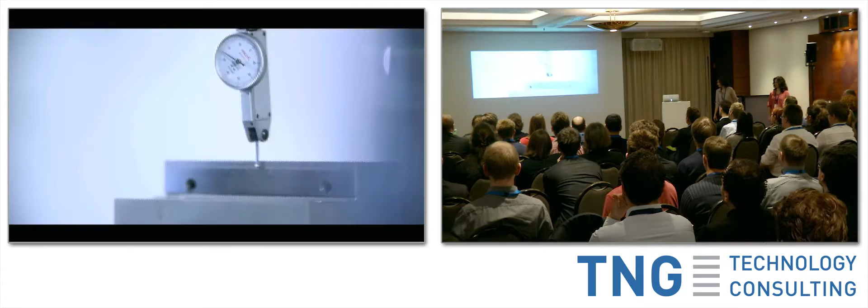The Hyperloop is a very perfect project to learn to design things. And this in itself is so important. So this will have an impact on engineering in the future. We want you to get on board and join our Hyperloop ride. We want you to share the same vision as us, the same vision as Elon Musk for a greener and more sustainable future of transportation. We want to tackle the issues of global warming, of traffic and pollution. And this has to start now, and we can only do this by innovating, disrupting the current mobility system. I not only think this is a very good idea, I'm convinced that they will win the competition. I'm crossing my fingers that they will succeed.

So yeah, Walter is probably right. We'll probably win the competition anyway.

But yeah, just a short introduction. So what is the Hyperloop? Whenever I tell somebody that in the future you will travel from Munich to Berlin in half an hour, the first reaction I always get is that everybody thinks I'm talking about science fiction and this will never happen. I'm here to tell you today that the Hyperloop is much more feasible than any of you ever probably imagine, especially because most of the technology behind it is actually things that already exist today.

And basically what the Hyperloop does is get one piece of technology from each application, copy and paste it, and combine them together in its own environment. So for you to have an idea how few different things there are in the Hyperloop: we are building a Hyperloop pod and have not come up with one patent or one research topic that we can register, because all of these things actually already exist by themselves. It's just the way of combining them that actually builds the Hyperloop.

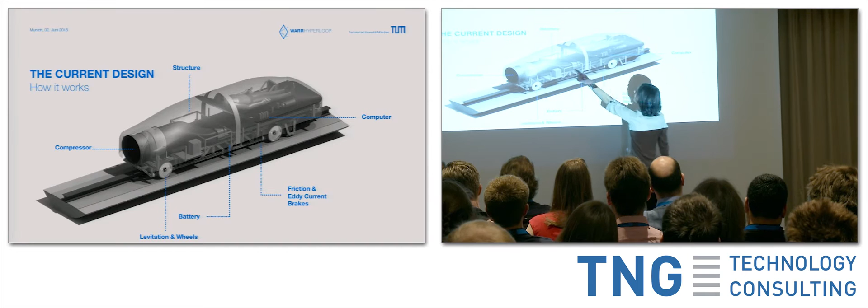So yeah, the compressor is a key feature of the Hyperloop. And I'm going to get a bit more into detail about it later. But now just an overview. What it does is that it basically sucks in the remaining air in the tube and acts as a big vacuum cleaner, sucks the air in the front, passes it through this air duct, and expels it out in the back. And there's an outlet in the back that you can't see from this angle.

Our prototype currently contains 6 subsystems, the very important compressor. And the compressor is operated by an electric motor, because one of the key motivations of the Hyperloop is to build a green transportation concept. That electric motor is operated by an onboard battery. We are trying to build a battery that has that awesome Tesla feature where you can slide it in and out and just very easily have a backup battery.

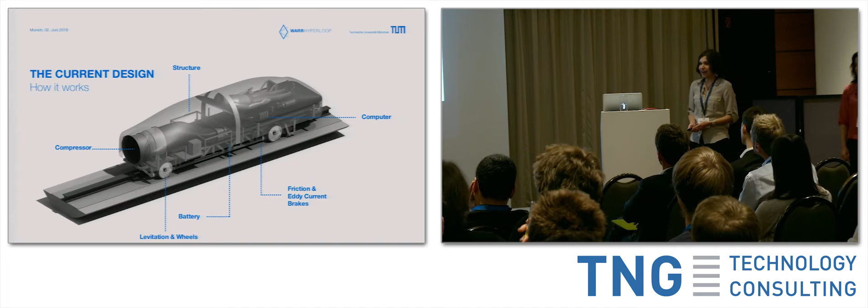Of course, anything that speeds up to 1,200 kilometers per hour needs to have a hell of a braking system. And therefore, we don't have one braking system, but we have 2 of them. Diana will go a bit more into detail about that later. The friction and eddy current brakes, one for high speed and one for the final part.

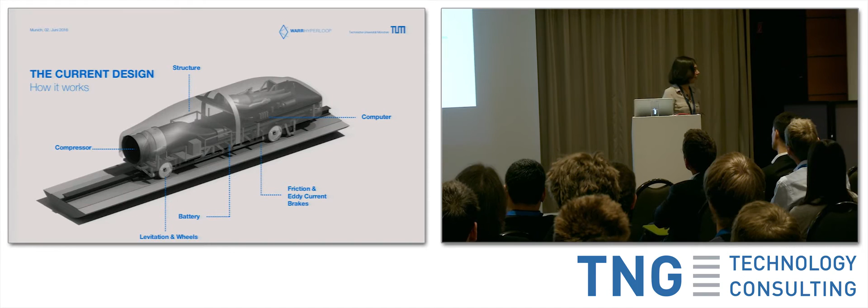I already mentioned another key concept of the Hyperloop is the levitation. And before everybody kills me for having these wheels in there, I know they are not as beautiful as just a levitating pod. But there are very good reasons for having wheels. There is a very good reason why wheels were one of the first inventions of humankind. They react beautifully up to actually quite decent speeds. And then for the high speeds, when they can't handle it anymore, then we levitate.

So our current concept is to have a Hyperloop similar to an airplane. You have wheels in the beginning and the end when you are not at extremely high speeds, and then after you reach a certain threshold, you levitate. More on that and how that works later.

The structure is a lightweight structure. We try to keep it as modular as possible in order to be able to integrate all the systems on it. And the brain behind this whole thing, I'm sure there are many computer scientists in this room, is a very fast computer that Diana is also going to go a bit into detail on later.

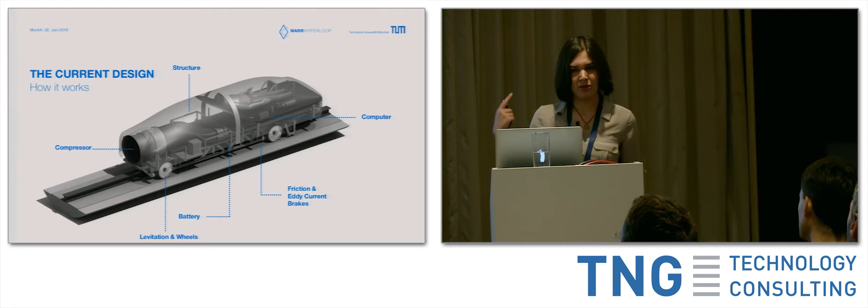Another question that always comes up when I show this picture is why only one person? Well, why only one person? The answer is a competition. We are not building a full-scale Hyperloop. We are building a prototype. And the second question that comes up is, what is the scale of your prototype? And the answer to that is a bit more complicated.

Because when you're building the technology that we're building, the compressor, the brakes, even the levitation system, most of those things are quite easy to scale. As long as you maintain the same tube-to-pod ratio, you really just make the pod longer, and that's OK. And making the pod longer is basically a design problem and not an engineering problem, which is why we don't really focus on it. Design, I will totally agree with you. We do not have the most beautiful pod in the competition. But we do have one of the most scalable and one of the technically best, in my modest opinion.

So Elon Musk announced last July the student competition through his company SpaceX. Originally, over 700 teams were registered in the competition. And yeah, when I saw the announcement in my Facebook feed sometime in July, I said, that's a hell of a project. That sounds like something we could start. And then the story goes that I called her at 12 in the evening or something, and the girl didn't sleep all night.

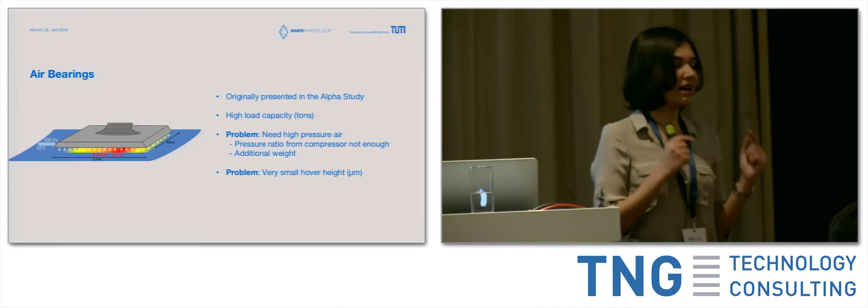The other cool thing about air bearings is that in a full-scale Hyperloop, you have a huge compressor in the front, sucking in all that air. What do you do with all that air? You throw it to the back, but if you compress that air at a high enough pressure ratio, you can actually use the air that you get from the front for the air bearings. If you connect the air bearings to the air duct that I showed you earlier, this is how that would work. And it's a very cool concept, but it has some problems if you think about actually constructing it and putting it in production.

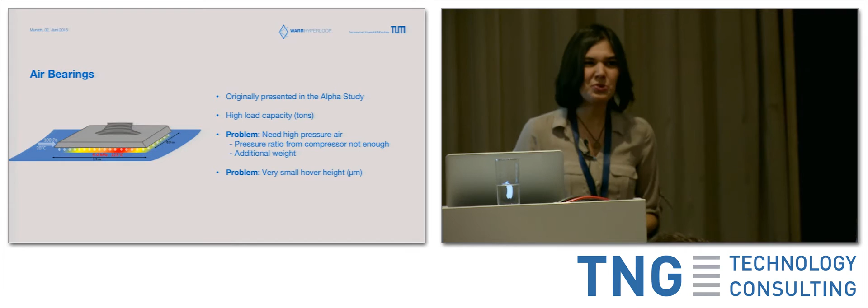One of the biggest problems is that the hover height, so the height at which you would levitate using this concept, is like micrometers, which really isn't the safest thing on the planet, let's put it like that. From the beginning on, we said we wanted to build a prototype that was safe and scalable.

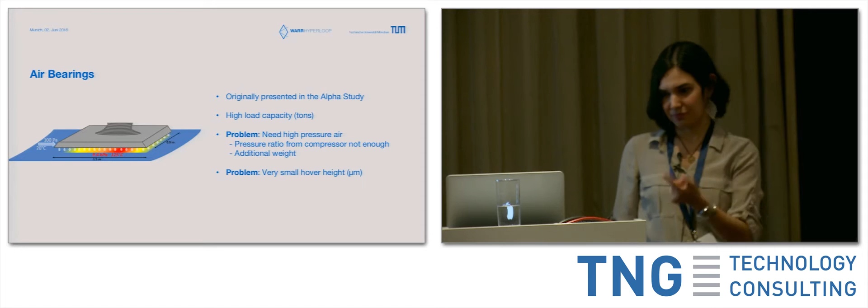And there were two very good reasons for not going with air bearings in our design. One of them was, of course, the safety issues related with micrometer hover height. And the second of them was that the air bearings could actually work nicely in a full scale, but we're not building a full scale, and therefore the compressor that we have in our prototype cannot achieve the pressure ratios necessary for this to make sense.

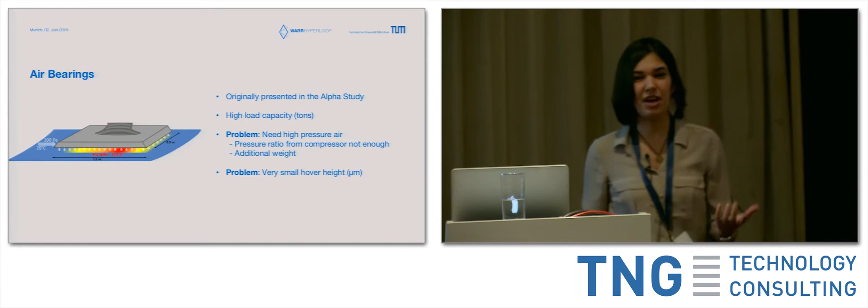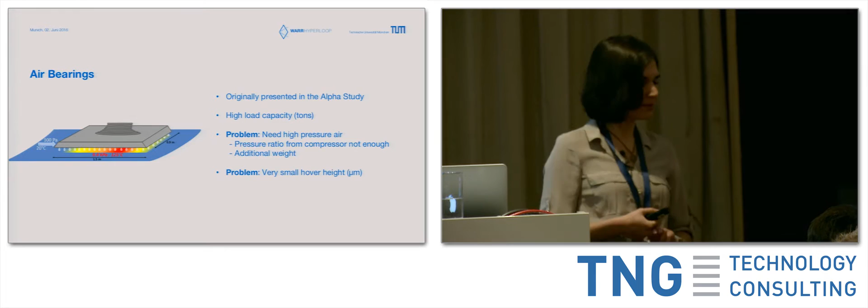That means that we would have to carry pressurized air on board in order to have an air bearing, which means a lot of extra complexity, extra weight, and weight means less speed, and weight is always something that you should try to avoid. For those reasons, we actually ruled out air bearings quite early on. Of course we looked into it, because it was the concept explained in the alpha study.

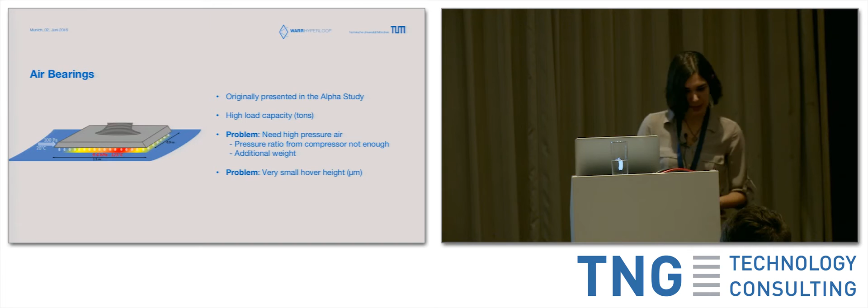But at quite an early stage in the competition, we actually decided to try to go with these rotational magnetic hover engines. There's actually a very awesome YouTube video. You can Google Arx Pax hover engine, whoever wants to watch it. The guys actually created a hoverboard that actually levitates. They are discs about this size with big magnets that have a motor in the middle of them and therefore rotate. By rotating, you then create a magnetic field that allows you to levitate.

There's a company producing that. They are called Arx Pax. And from very early on, they announced that they were supporting the Hyperloop competition. And since they were supporting the Hyperloop competition and they had this amazing technology and they were producing it for us, that was a lot of work that would get removed off of our hands. So we actually, for a very long time, considered using the Arx Pax.

The idea is brilliant, and it has some very interesting additional benefits, such as since the hover engines are rotating, you can levitate your pod even if the pod isn't moving, which is something very useful for testing. If you can levitate it anywhere, it makes testing quite easier. And of course, it's just cool. Everybody wanted to do the hoverboard test with it when we were talking about using the Arx Pax.

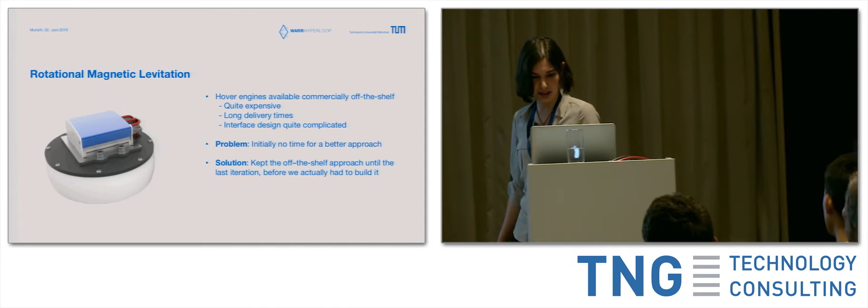What we eventually realized is that at high speeds, the Arx Pax were just very expensive permanent magnets. In the beginning, you have this awesome feature that you can levitate standing. The Hyperloop isn't meant to stand. The Hyperloop is meant to go fast. And when you're going fast, you can get the levitation effect even without rotating because you have the difference in speed between the pod and the tube. You can achieve that with a permanent magnet. And they needed to be lubricated, which presented a cooling problem, and they needed to be pressurized, which increased complexity.

We eventually decided to remove the Arx Pax, which was probably one of the biggest and hardest decisions in our team because it was very controversial. Some people just thought, we have this system, it works, we'll find the money somehow. And other people were like, we can do so much better than that. Can we do so much better than that? And can we do so much better than that in a few months' time, which is always the timeline in the Hyperloop? Our current concept, you might remember my rendering earlier.

We introduced the wheels. Wheels are very controversial because they are not part of the original alpha study Hyperloop. They make the pod look ugly. We lost 1,000 sexy points the day we added those wheels. It's true. The cool thing is that it levitates, and the second people see a wheel, oh, it's just a car. It's not a car. It's a Hyperloop. But the wheels make it look like a car. FYI, the wheels are only necessary in the beginning and in the end. In the middle, we have permanent magnets.

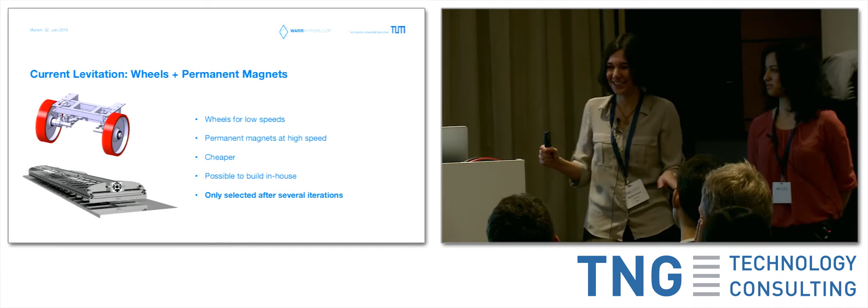Airline companies do not like having big magnets on board. They really don't. Even if it's cargo, even in cargo airplanes, they simply say cannot. Just pure cannot. So yeah, those are a few of the problems that you never think you'd run into.

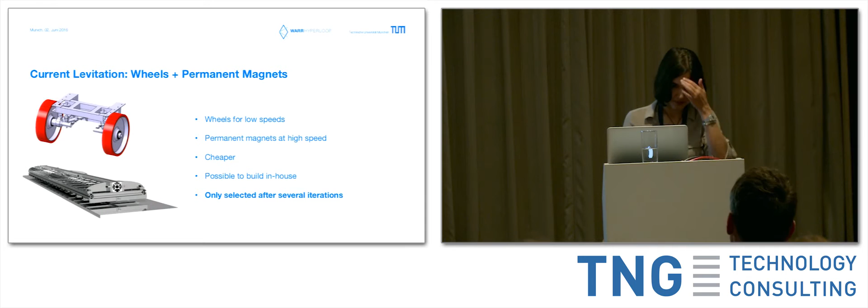The solution to the magnet transportation problem is actually finding a supplier. As I said, the advantage of them is that they are cheap. So we actually bought them twice and had them once delivered to Germany, where we build them into the pod, test, make sure that it integrates and everything works, remove them, ship it without the magnets, and have the exact same magnets delivered to Los Angeles and build them in over there. It took us a while to find a supplier that did that, because basically it's delegating the transportation problem to the supplier instead of us, but it worked.

And yes, you do. Even if most of the teams in the competition do not agree with me, and even if a very, very high percentage of the teams decided to remove the compressor, it is essential for the Hyperloop concept. It is the only thing that makes the Hyperloop work. I'm going to go into a bit more detail here, because it's one of the reasons that makes us different from most of the other teams. And it's also one of the reasons why the Hyperloop is the Hyperloop.

The thing that is important to understand here is that our test track is only 1.5 kilometers long. So you really don't have the amount of air or time or length to actually have the accumulated air in front of the pod. The whole idea behind the compressor, if any of you have ever used a syringe, is that if you press it down, it's going to get harder and harder the more you press, because the air in front of it is getting compressed into the smaller space. Since we don't have a 600-kilometer test track from Munich to Berlin, we don't have that. The space is not critical, and the air could still get compressed.

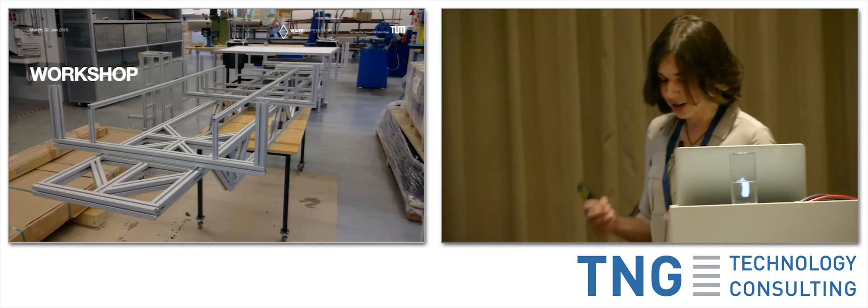And nothing like motivated students to actually build a pod that has so many changing requirements always. And one of the systems that suffered the most with changing requirements was the braking system, which Diana now gets to talk a bit more about. You can go.

So I will speed up a little bit because, as usual, it's a lot of information. So actually, the initial... Is it working now? Yeah. Sorry.

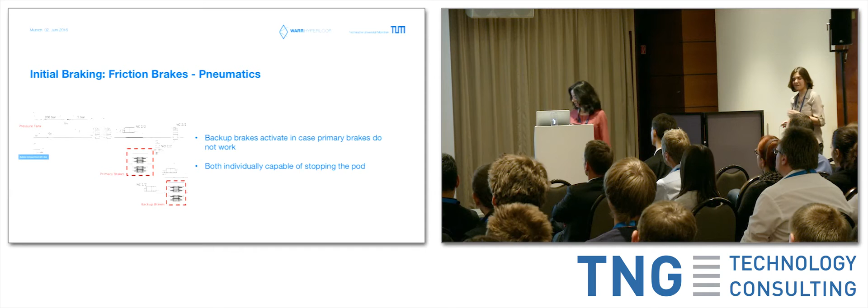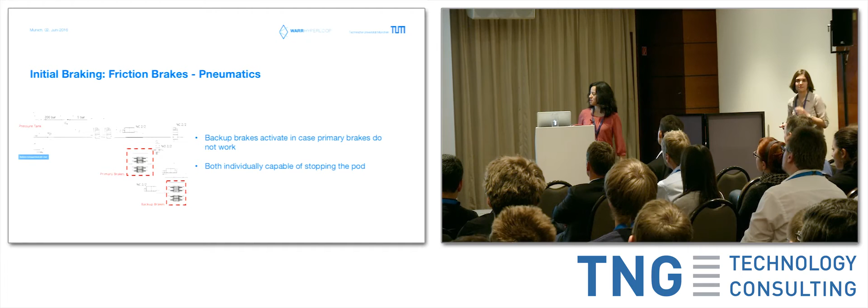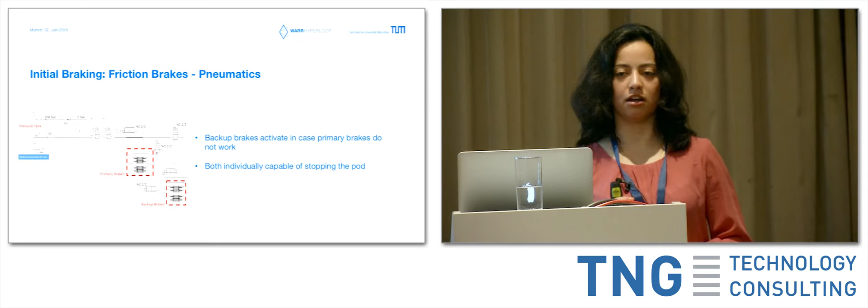So the initial plan was to have friction braking only, which is actually the pneumatic system. As you can see right here, there is a pressure tank. We actually use a scuba diving tank to put a lot of pressurized air inside. And then it's controlled by 5 pressure valves here. In the initial state, the brakes are deployed. That was for our safety, because in case something goes wrong, computers don't work or some cabling doesn't work, the worst case for us is just stopping the pod. So we will not crash the tube, which is actually a requirement coming from SpaceX.

So whenever we want to release the brake, we just configure this valve. We open it for some time until the pressure comes to the brakes. Then, as the pressure comes from both sides, the springs get released, and then you have released brakes. Besides that, we also have redundant brakes. So in case something goes wrong and the main braking system is not working, the secondary one is still able to stop the pod to 0 kilometers per hour. So we will have no problems with stopping the pod in any case.

But the bad thing is that requirements are changing really, really fast. And actually, one of the guys asked Elon Musk at a design weekend why the requirements are changing so frequently.

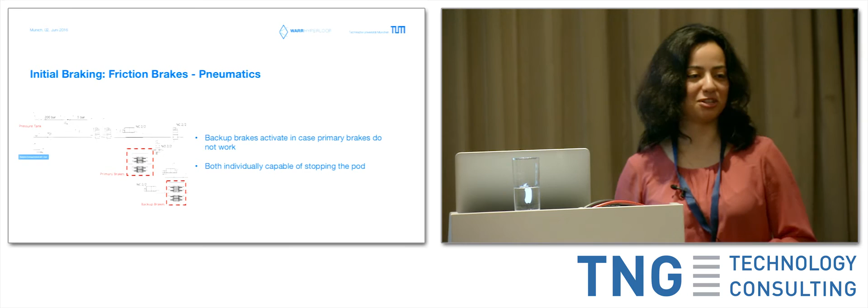And he actually told us it's also kind of a challenge, and you need to accept it. And yeah, we did. So here we decided to add eddy current brakes, because they told us that high-speed friction braking is not allowed anymore because we can damage the rail. So we had to come up with other intermediate braking until we can use our friction brakes. And here is where the eddy current brakes come in; I will explain a little bit later how it's working.

And the problem with eddy current brakes was that we really had no experience with that. And we didn't know how to test it, because simulating is a really hard problem. And the solution for that was to hire new people to the team, and also have great sponsors who advised us a lot and helped us with simulating all the stuff. And that really helped us a lot, and now we already have a structure for how we can have our eddy

currents working. And here is the image, the CAD model of our eddy current brakes. The brown ones are the copper wires, and these gray things are iron, just pure iron. It's not powered in the beginning. It's actually using the same battery pack as the compressor. So whenever we start the eddy current brakes, we need to power off the compressor. So the energy goes from the compressor to the eddy current brakes.

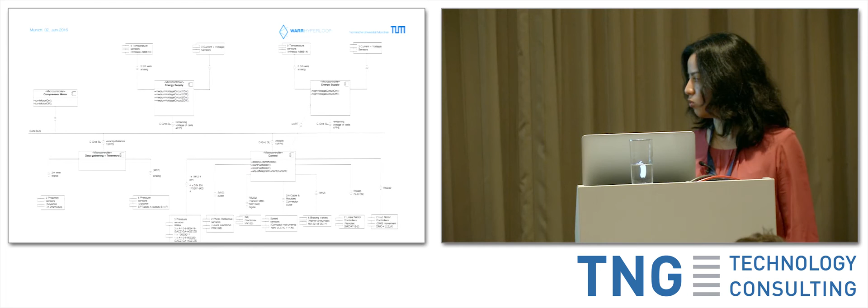So mainly we also have redundancy in sensors. Here, for example, IMU and speed sensors. This is the rotational speed sensor, which is counting the rotations of the main wheel, from where we can get the velocity of the pod, so the speed of our pod. And the IMU also has an accelerometer inside. So we tried to keep sensors as redundant as possible so that we can know which one is actually right, because maybe some sensors will not work. Actually, in vacuum, it's quite hard. So we also need to test how sensors behave in that environment.

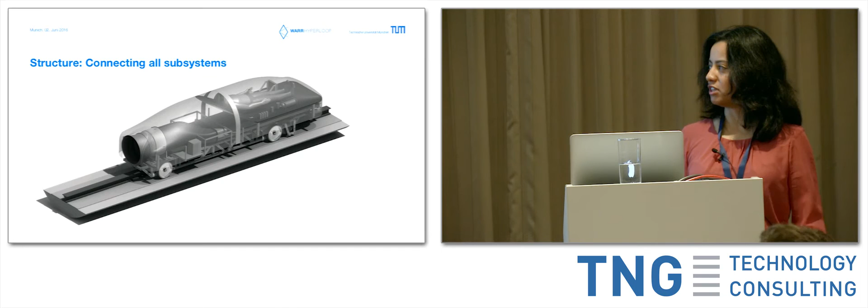And all of this, of course, needs to go to the structure, which needs to be light, because we already have a compressor which is really heavy, and we wanted to make it as light as possible because the levitation needs to be able to hold it up. For that, we use a carbon fiber hull, which is expensive but really light, and it meets all our requirements. We also have the lateral stability guided wheels, which are touching the rails from the sides, so that whenever we start levitating, we have stability, because otherwise we couldn't do that. Only with permanent magnets you cannot handle the stability there.

So now we come to how we can test it, because it was really hard. We don't have access to the tube until we go to Los Angeles. But whenever we reach there, it's really too late to change something if it's not working. So we came up with several ideas how we can test it.

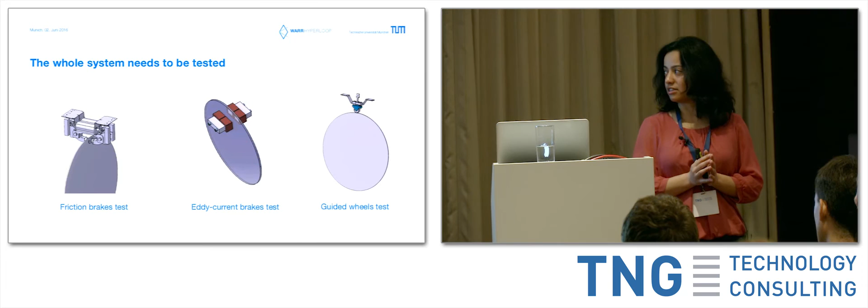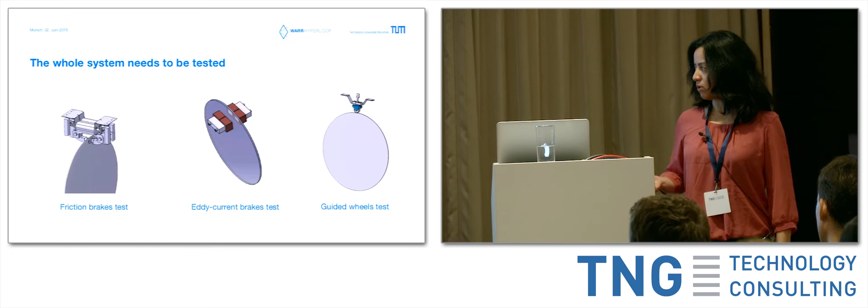The first one is we will make a test bench for braking. Here, these are the friction brakes, so we need to know how much power we need to put into the rails so that we stop but still don't damage them, and we need to know the braking distance and also the time it will take. The other one is the eddy current brakes, which also need to be tested for the speed and also the heat, because eddy current brakes produce a lot of heat, and we also have a problem of heat there because it's almost vacuum.

And the guided wheels need to be tested because they are really small, so the rotational speed of the wheels is really high. So we need to be sure that they will resist that speed, and for that we need to test it in the test bench.

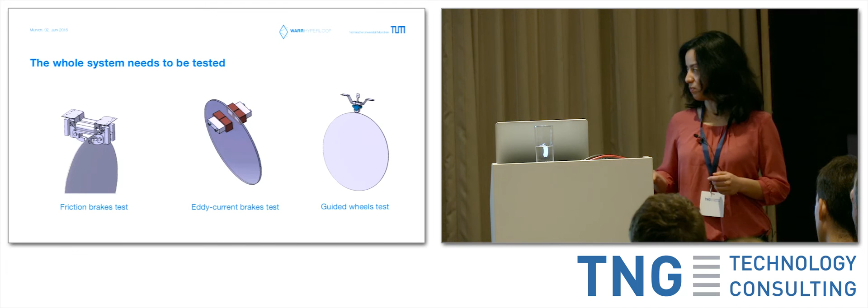The other type of test we came up with is the vacuum test. We have vacuum chambers, and we need to test mostly electronic stuff because we don't have a lot of air inside like we have here. And that air maybe is not enough to take heat out. So we need to keep everything really simple so that we don't use a lot of electronics producing a lot of heat, because we cannot handle it in that case. The whole system will be tested at the end of June, and we will even put the compressor there so all the system will work, and we will see how the heat is handled.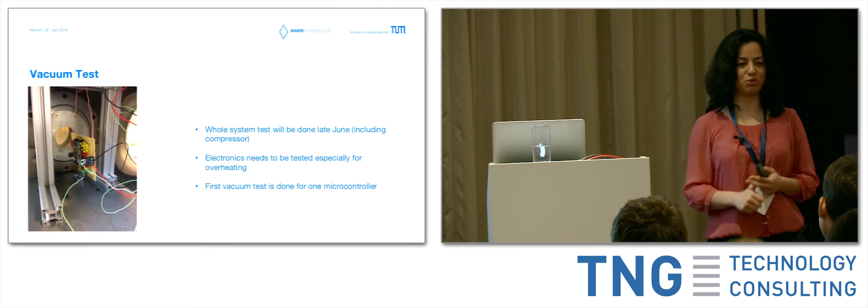And the next test is going to be next week, Tuesday. It's going to have the CAN connections between them, and also some sensors connected so that we can see if the sensors are working, how they are behaving in that environment, and how precise their values are. And yes, as you can see, all of this is a really crazy idea, and this is new technology.

And we found one part which is really fitting our way of thinking, which is: two roads diverged in a wood, and I took the one less traveled by, and that has made all the difference. And yeah, we did it. We went the hard way, but we're actually really happy to make it happen, and we already see the results coming out. Thank you very much.

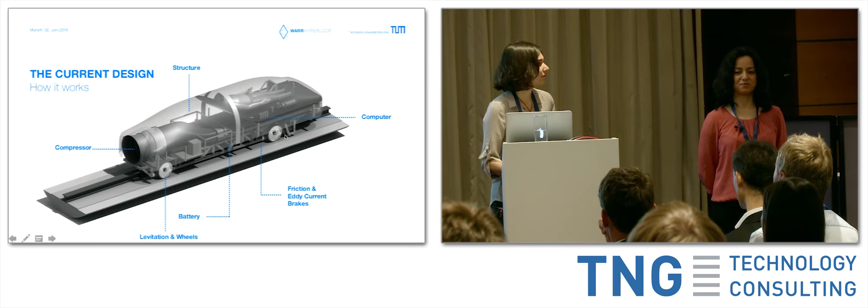But I didn't quite get what happens if your battery breaks. You don't have any power supply anymore. Are you stuck in the center of the track, or do you continue and at some point the brakes kick in? You can basically use the eddy current brakes only when you have power. In an emergency are you still using the other brakes, or do you use air for braking? Okay, so as Diana explained earlier, the second the battery goes out, the second the energy is lost, the friction brakes will automatically kick in. You have it? Yeah, I did.

Repeating the question: what happens in an emergency situation if there is no energy, and how do you maneuver the pod out of the tube? The second the battery goes out, the second we lose energy, because of the pneumatic design the friction brakes will automatically kick in and stop the pod. So the first thing is to stop the pod so that it's not traveling uncontrolled at who knows which speed. Friction braking for emergency braking is not ideal, but this is an emergency situation, so that's okay. It would probably damage the tube a bit.

And how do you remove it from the tube? This is this part of the design here. Maybe you can't see it too well because it goes inside, but we have a system called the low-speed maneuvering system, which is really, really low speed. You are not supposed to travel the tube with it, but you can. This is exactly the situation where it comes in. They are retractable hub motors, so retractable wheels with hub motors inside of them; they go down, and then you slowly go.

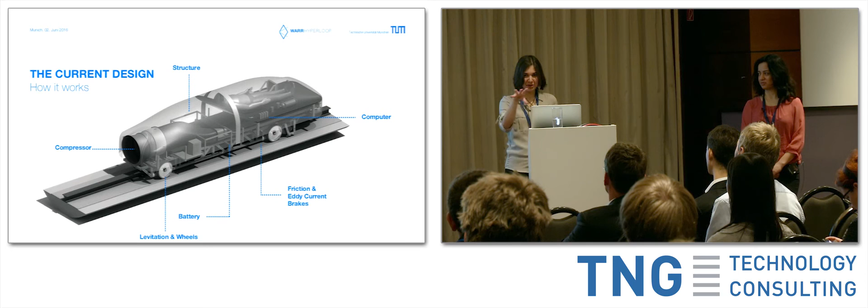And do you have any collision avoidance? I guess there would be a lot of traffic in these tubes, and if you break down and have no power, you can't tell anybody. That goes back to the computer intelligence. It is the responsibility of each pod to watch what is happening in front of it and activate its own emergency brakes if necessary. So you can have a camera looking in front that will be fast enough to activate the brakes.

Actually for the competition we didn't do that because it's not a requirement. We will be alone, and it's just a straight tube. So there is nothing which can come up in front, and because of time problems we skipped it. But it's not a problem. We even thought to put a laser or a camera in front; then we removed it because of time constraints.

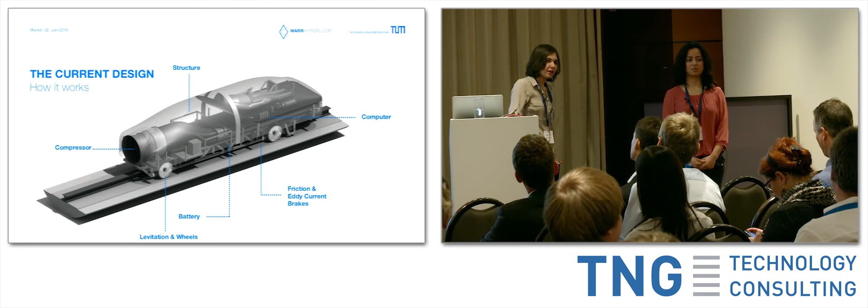Yes? Question? Yes, over there. Is it designed to go only straight, or can it also turn? The question was how does it handle turns?

So yes, the Hyperloop is designed to go as straight as possible. It does not react very well to curves. You need a huge curve radius to even start thinking. When I say huge, we're talking like 100 kilometers radius for a curve, because you don't want to do a curve going at 1,000 kilometers per hour.

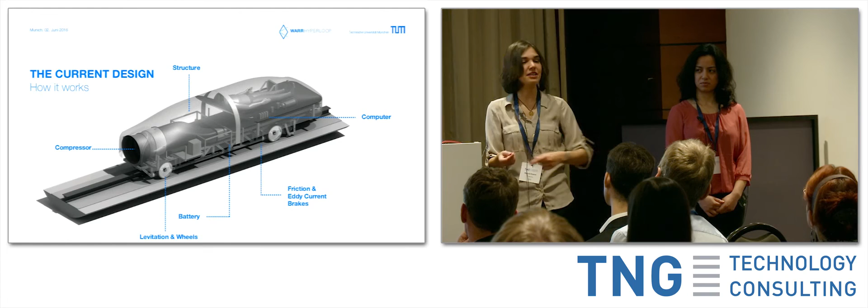So yeah, the idea is you can make a curve to go, for instance, outside of the city. You can't connect city center to city center in a straight line. The idea is you make a curve and go at low speeds, get out of the city, and as soon as you get out of the city, you start accelerating, and then you have a straight line into the other station.

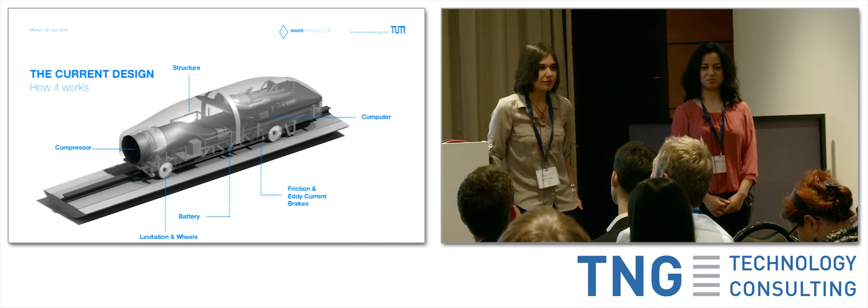All in the back, please. I was having the same question, but given your answer, I think your actual problem is that you need a lot of digging technology for tunnels. Cities are at different heights, is there any idea how you solve that problem? Yeah, so the question was how the tubes are going to be made, because the cities are at different heights, so you need to handle it somehow.

So the answer is that we are designing only the capsule, but from our guess, from the research we already had on it, it's going to be over 6 meters above the ground. Because it's a closed system, if you need to dig through the mountain, then you have pressure problems there. So it's best if it's over the ground. So even if you have different heights, they will just put it like this, but not dig it inside, or maybe only short parts.

Also, one way you can correct it: the tube is not underground. The tube is overground in order to reduce construction and infrastructure costs. And the pillars that sustain the tube, you can make them different heights to correct terrain height differences. So it's not a problem if one pillar is a bit taller than the other one, as long as the tube that they connect stays at the same height. Then the pods will stay at the same height.